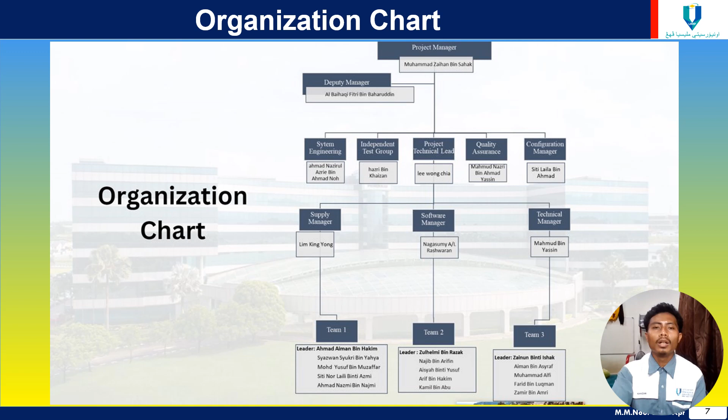Assalamualaikum. My name is Baihaqi Fitri bin Baharuddin, VB21010. For today, I will explain my part, which is methodology in our project.

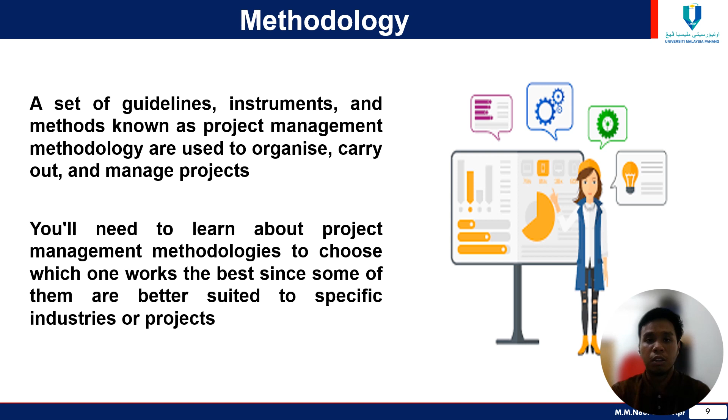The definition of methodology: a set of guidelines, instruments, and methods known as project management methodology are used to organize, carry out, and manage projects. You need to learn about project management methodologies to choose which one works best, since some of them are better suited to specific industries or projects. This means methodology is very important before we do our project or plans.

The first method that we use in our methodology is the Kanban method. Kanban is used to define, oversee, and enhance services that deliver knowledge work, visualize your work, increase productivity, and continuously get better. Kanban is a very popular method that was invented in Japan. So in this method, we use 3 steps.

Which is to do, in progress, and done. In the to-do step, there are techniques to determine what work must be done. In progress, we record work that is being done. And when the step is finalized, we call it the done step. This guarantees the task is done on our schedule.

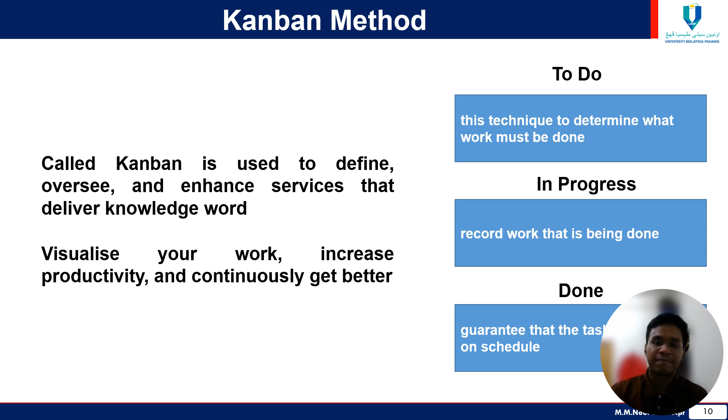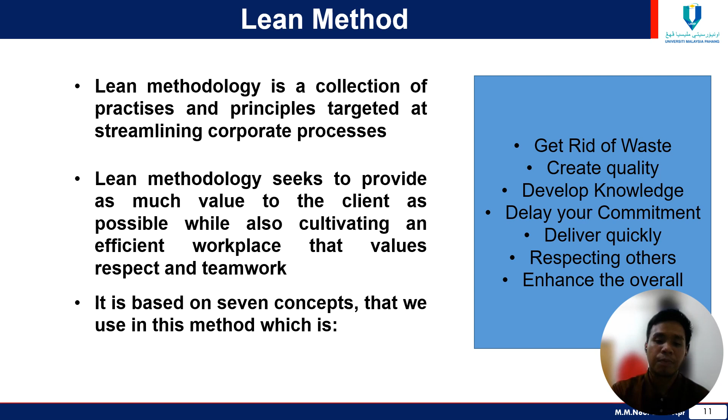The second method we use in our methodology is the Lean method. Lean method is a collection of practices and principles targeted at streamlining corporate processes. Lean methodology seeks to provide as much value to the client as possible while also cultivating an efficient workplace that values respect and teamwork. So why do we use this method? Because there are seven reasons: get rid of waste, create quality, develop knowledge, delay your commitment and deliver quickly, respect others, and enhance the overall. That's why we think the Lean method is one of the important steps we can use for our projects.

The next step that we use is the Six Sigma method. Six Sigma practitioners increase company function and quality control, focusing on managerial strategy that aims to increase performance by getting rid of waste and error while promoting job standardization. Have well-defined data collecting goals such as specifying the data to be collected, the reason for the data collection, the expected insights, guaranteeing measurement accuracy, and implementing standardized data collection methods.

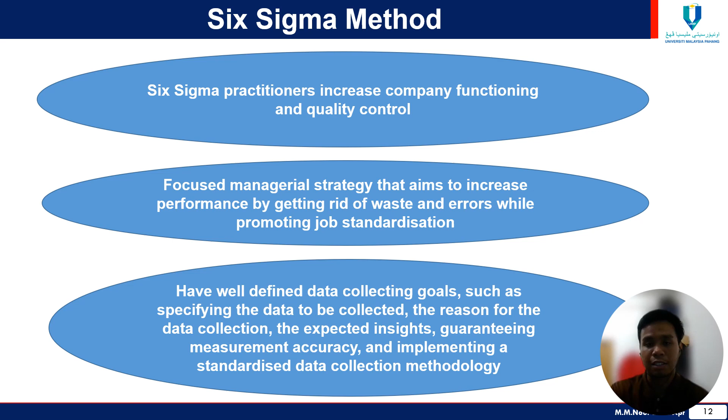So we use a method that is very popular in Six Sigma. I will explain it in the next slides. This is the method that we use in Six Sigma, called DMAIC: D for define, M for measure, A for analyze, I for improve, and C for control. Define is defining the problem, then we measure and quantify the problem, then we analyze how we can solve the problem. If we find a solution, we improve the problem and make a new style, and then we control it so we don't get any more problems.

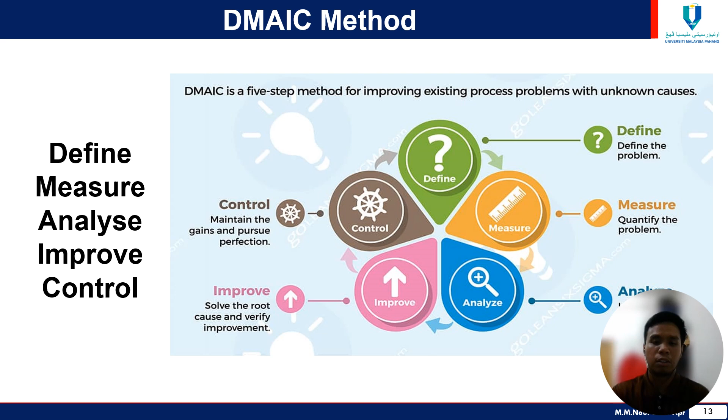The next method that we use is the just-in-time method. Using just-in-time, or JIT inventory system, we can place orders for inventory components directly in line with the production schedule. JIT manufacturing technique reduces inventory costs since we acquire supplies and pieces as needed for production, rather than paying storage fees. In a just-in-time system, you order only what you need, eliminating the risk of stockpiling unusable goods. Just-in-time can minimize waste while maximizing our profit, since every production will clear out the items we have before they become unusable goods and waste our money and time.

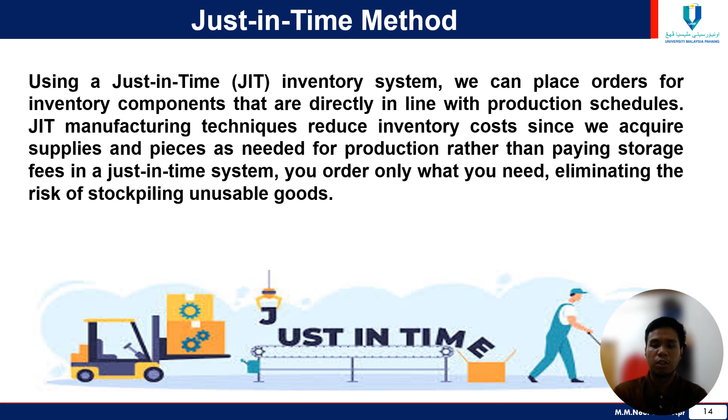Data collection method is one of our methodology that we use in our project. Method of data collecting are approach and procedure used to acquire information for research objectives. Survey, interview, observation, focus group experiment, and secondary data analysis are all typical data collection methods.

Design method: the key to design methodology is finding the best solution for each design situation, whether in industrial design, architecture, or technology. Design methodology also employs basic research methods such as analysis and testing. The evolution of design approach has been strongly linked to precision for a systematic design process.

We use this design method to design our plant in our new manufacturing facility. Design method is very important to emphasize and implement if there's something wrong with our plant designs.

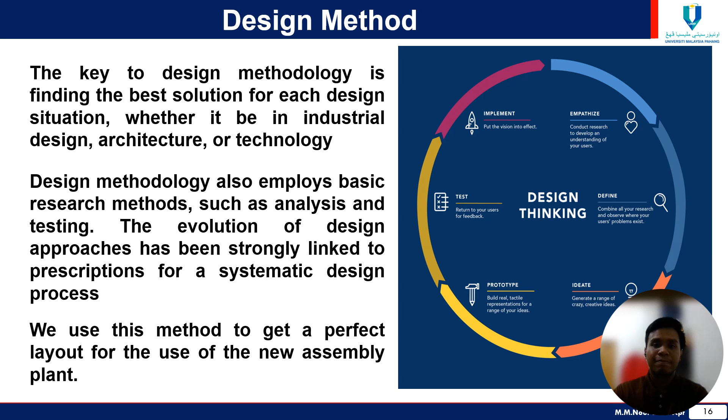So that's all from my part in methodology. Thank you for listening and watching.

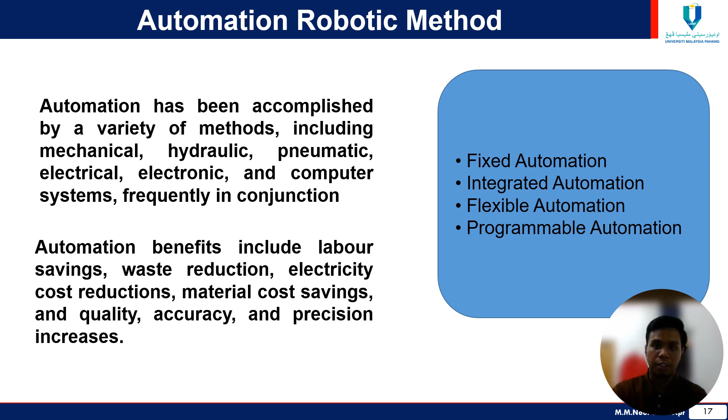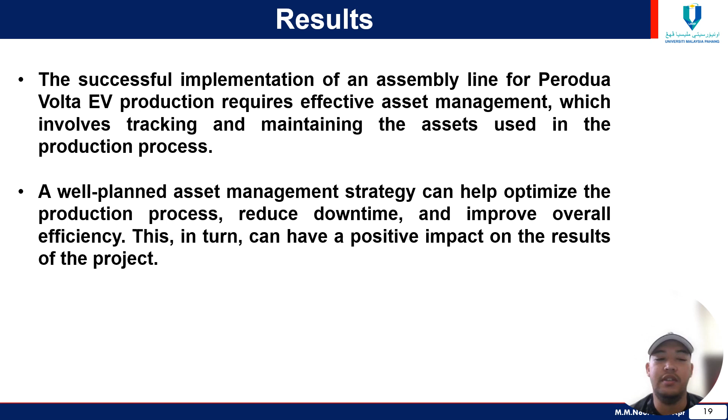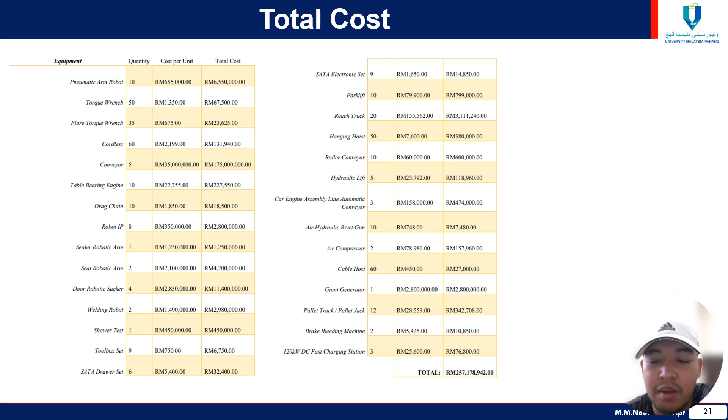Next, Perodua Volta EV assembly line implementation requires significant equipment and personnel investment. The cable host costs RM450 and the conveyor costs RM35 million, totaling over RM257 million for the listed equipment.

However, assembly lines improve production efficiency, quality, and standardization. So these assembly lines will improve production efficiency, quality, and standardization. Robotic arms and conveyors that we bought can boost productivity and reduce errors, and also the shower test that we bought can also boost product quality and customer satisfaction.

An assembly line for Perodua Volta EV production and asset management can increase efficiency, quality, and customer satisfaction, resulting in a high return on investment. I will explain about return on investment later.

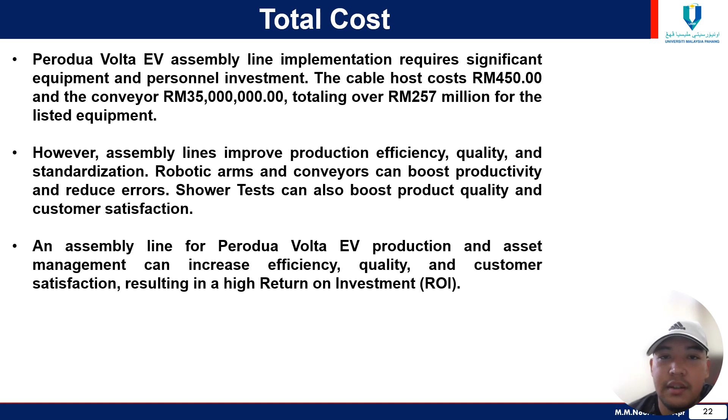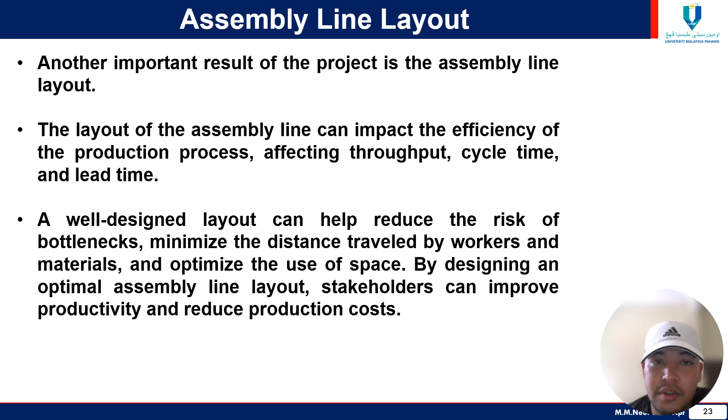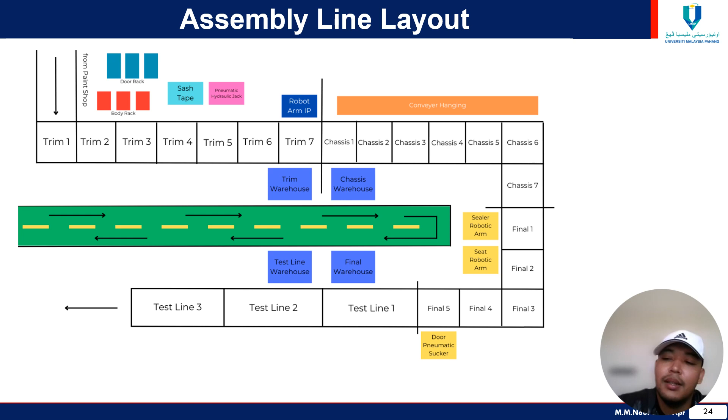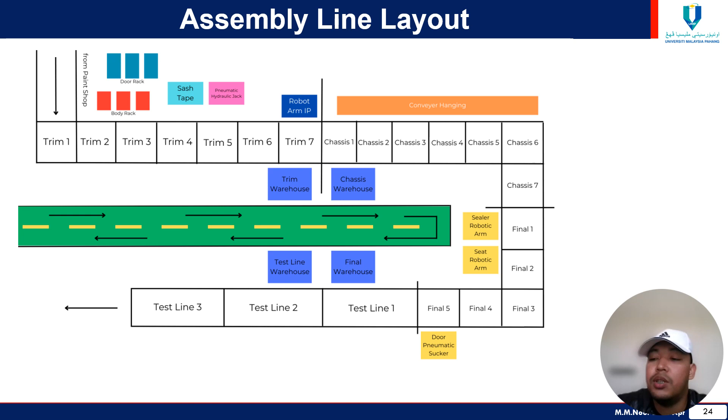Seterusnya test line. Test line yang pertama kita akan lakukan ujian bumping test. Test line kedua kita akan buat ujian alignment dan juga headlamp adjustment, dan test line ketiga kita akan lakukan ujian speed test. Jadi pada setiap bahagian ia mempunyai checkman, iaitu trim checkman, chassis checkman, final checkman dan juga test line checkman.

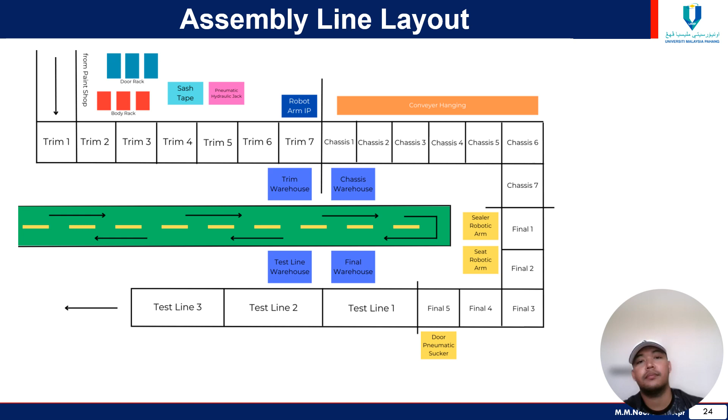Okay, seterusnya, in manufacturing, assembly line layout is crucial to production efficiency and productivity. A well-designed assembly line can improve quality, speed, material handling, and manufacturing costs. It reduces material handling, transportation, and assembly time by reducing workstation distance. This can boost production and reduce assembly bottlenecks.

Dan okay, untuk bahagian ni kita perlu mencipta assembly line yang betul-betul produktif, supaya ianya lancar, dari segi handling, material handling, transportation, dan juga dapat mengurangkan masa assembly dengan mengurangkan workstation distance. Jadi line assembly ni kita cipta tidak terlalu jauh, dan juga tidak terlalu rapat. Okay, ini akan boost production dan juga akan reduce assembly bottlenecks. Bottlenecks ni memang kita nak elakkan.

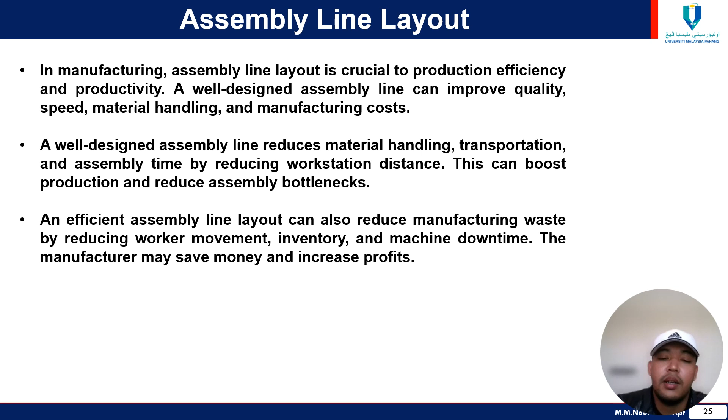Seterusnya, an efficient assembly line layout can also reduce manufacturing waste by reducing worker movement, inventory and machine downtime. The manufacturer may save money and increase profits. Jadi assembly line ni dia akan reduce manufacturing waste by reducing worker movement, dan juga ia akan mengurangkan cost dan juga increase profits.

Okay, next I will explain about return on investment. Finally, the return on investment, ROI, is a crucial result of the project. ROI measures the efficiency of the project by comparing the cost of investment to gain from investment.

Jadi untuk mendapatkan ROI ni kita perlu mengira. Okay, yang pertama sekali cost of investment iaitu aset yang kita beli, equipment yang kita beli, machines dan sebagainya, dan juga kita akan calculate dengan gain from investment. Maknanya ROI ni kita akan dapat tahu sama ada kita untung atau rugi.

In the case of the assembly line and asset management system, the gain from investment is the revenue generated from the production of Perodua Volta EVs. The ROI can help stakeholders determine whether the project is profitable and whether the investment in the assembly line is worthwhile. A positive ROI indicates that the project has been successful and is generating value for the stakeholders.

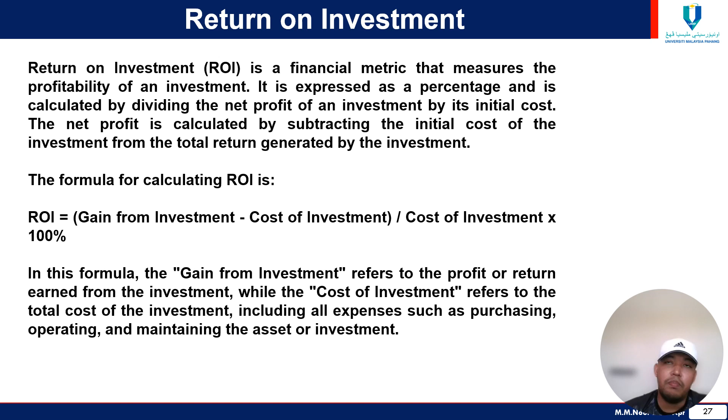Jadi gain from investment ni kita merujuk kepada keuntungan, profit atau return yang kita dapat dari investment, dan juga cost investment macam saya terangkan tadi, ia merujuk kepada total yang kita invest. Contohnya kita purchase asset, machine, equipment, operating, maintenance dan sebagainya.

Next, I will present to you about return on investment calculation of Perodua Volta EV using the formula that I have explained to you earlier. So 1 unit of Perodua Volta EV is equal to 75,000 ringgit. So for the estimated production for 1 day is 15 units. For the first month is 390 units.

For the first 6 months, 2,340 units. For 5 years, 23,400 units.

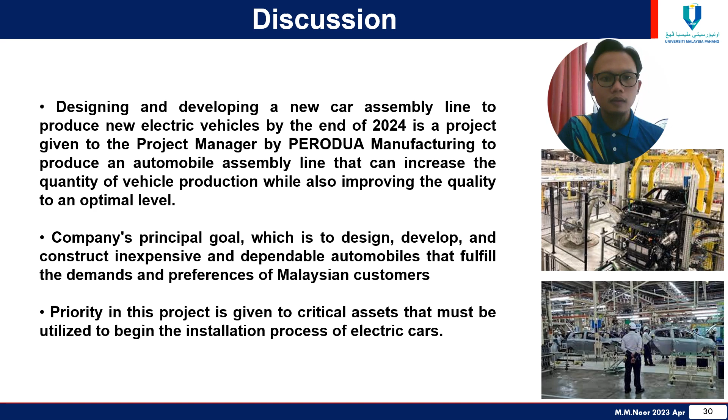Commissioning of the asset must also be acquired from other parties such as DOSH under the Factories and Machinery Act 1967. This is done to ensure the project is completed on time, that no losses are incurred as a result of project delay, that customer expectations are met promptly, and the newest vehicle model is launched instantly. Most importantly, defects in the assembly line are identified, repaired, and improved.

Once the asset is installed, we need to get approval from authorities such as DOSH and others. After getting approval, we are allowed to operate. Otherwise, we have to repair the deficiencies we have created so that the project is completed within the set year.

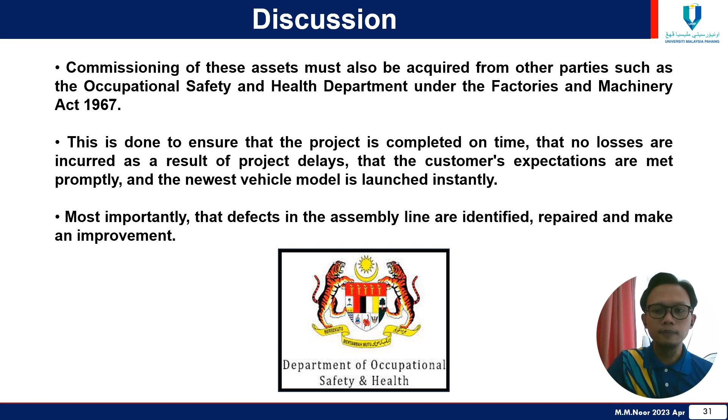Section 4.1: asset to be bought and asset specification. Purchase assets such as robots, conveyors, and equipment that must be present in the vehicle assembly line are underlined. There are various critical aspects to be considered, covering the kind of vehicle to be produced, the size and scale of the assembly facility, the estimated output, and the company budget.

There will be certain alterations and extra equipment to optimize the job and launch the assembly line flow. Conveyor systems, battery charging machines, arm robots, and other equipment used to assemble different vehicle components are examples of assembly line equipment.

Why do we say there are various critical aspects to consider? This is because we need to buy robots and other sophisticated equipment so that there are no interruptions during the vehicle assembly process.

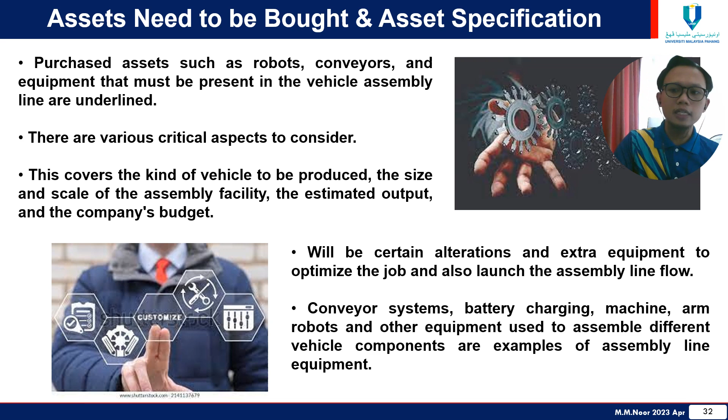Material handling equipment such as forklifts, reach trucks, cranes, pallet hydraulic jacks, and other gear used to transport throughout the assembly facility is critical. This maintenance and repair equipment is particularly important for repairing automobiles that have flaws and must be corrected so that product quality is not compromised.

In addition, material handling equipment such as forklifts and so on is also given importance, because it is important for smooth operation in production. We also list important equipment to carry out important work such as repairing cars or doing maintenance. Even though it's expensive, quality should be our priority.

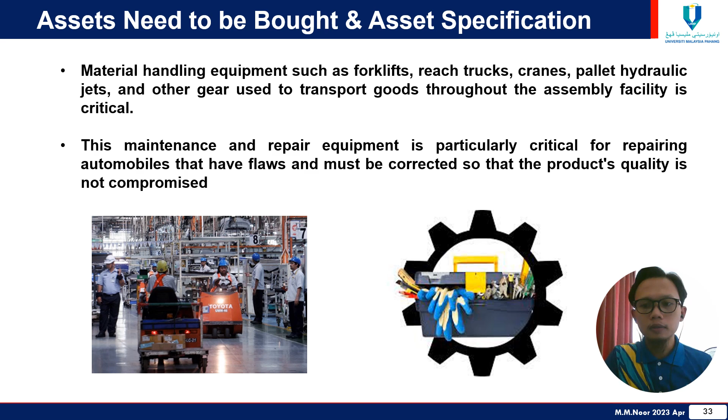So total cost. The whole cost of planning and creating a new production line for a new electric car is quite expensive. Total cost is critical in many aspects of project management, including not just project but also many other aspects of management. This is due to the fact that it enables stakeholders to plan spending rate, prevent loss from occurring, and get insight into project success by comparing overall project expense to budget and timetables.

The total cost spent by Perodua Manufacturing to create a new assembly line for the production of electric vehicles. It costs a lot of money, but in order to respond to the government's call for green energy, this is the best step.

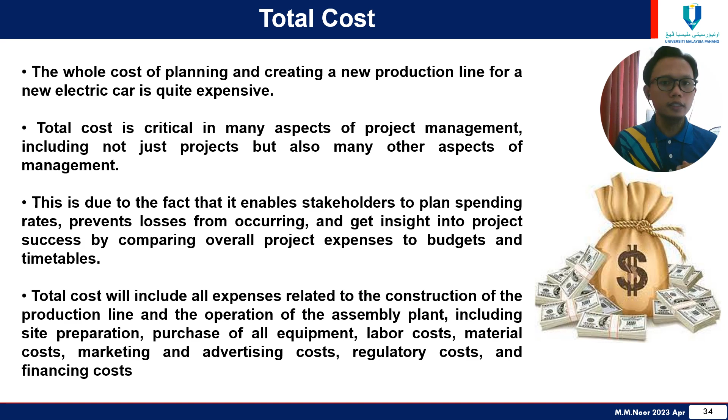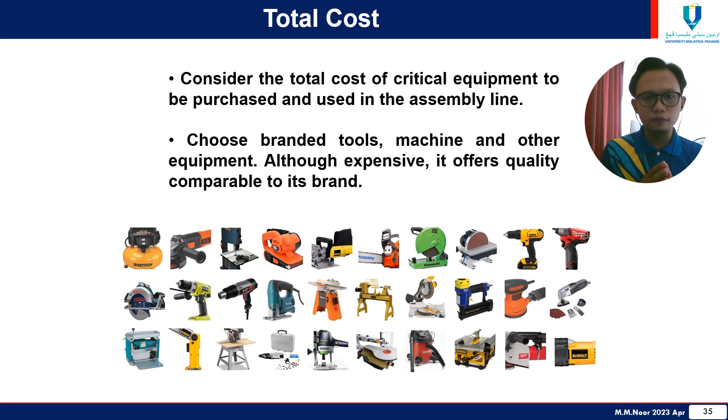So 4.3, this is a new assembly layout. This new vehicle manufacturing line idea needs extensive investigation. Several factors we consider, including the location of the site, suitable machine robots, equipment for assembly, as well as the estimated vehicle production on the production line within a day, plus more.

All study has been conducted by closely watching prior automotive manufacturing lines that create vehicles such as the Perodua Ativa, Myvi, Aruz, and Axia. One car assembly line has been separated into 3 divisions or departments that have various work procedures but yet fall under the same scope of work, which is the assembling of vehicle components. Trim, chassis, and final are the 3 departments in the assembly line.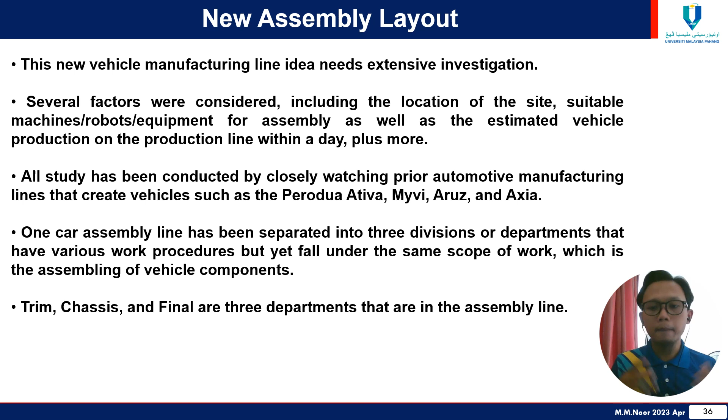The following is the new assembly layout for the electric vehicle assembly line. There are several departments in this production, including trim, chassis, and final. These three are the assembly departments, while the test line department is the department under quality control.

The work process in the trim department of a Perodua assembly line factory typically involves the following steps, such as vehicle arrival, interior component installation, electrical system integration, and many more.

While other work processes in the chassis department, examples are frame preparation, suspension and steering, brake system installation, drivetrain assembly, exhaust system installation, and many more.

And lastly is the final installation process in the final department. The work process in the final department of a Perodua assembly line factory, also known as the final assembly department or the finishing department, typically involves the following steps, such as electrical system verification, fluid check, wheel alignment, testing and quality control, final inspection, and the last is documentation and verification.

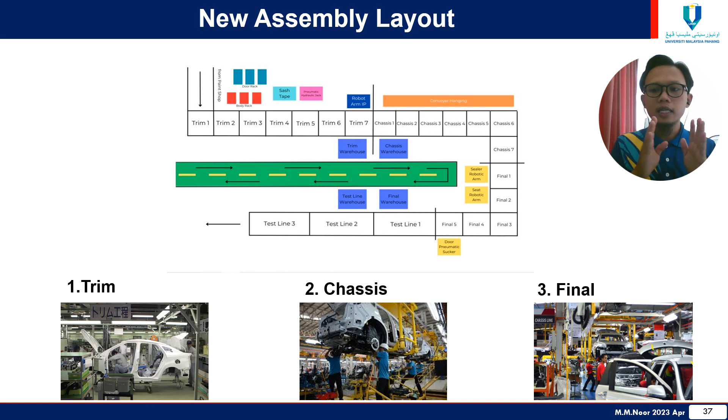4.4 Return on Investment. Return on investment, or ROI, is a method utilized while executing a new assembly line project for a new electric vehicle manufactured by Perodua Manufacturing. It gives a quick and easy way to assess an investment's profitability and financial success.

ROI simply needs basic financial information, which is why it is considered that the cost is easy to calculate, use, and comprehend. ROI may assist in analyzing the company's success by tracking investment ROI from time to time according to the firm's investment. Decision makers can review investment performance and make modifications if a project to be carried out can provide the company significant profit.

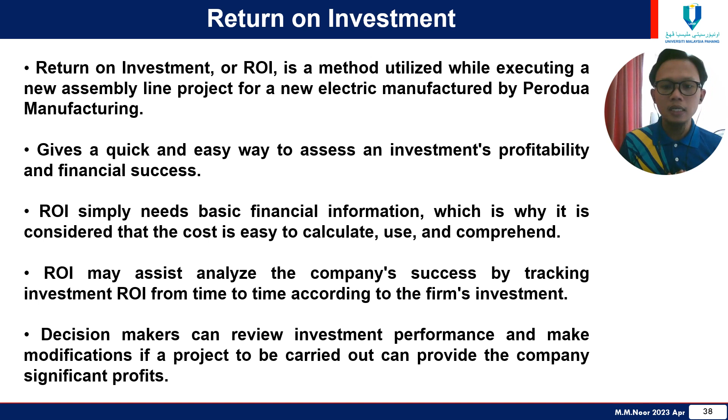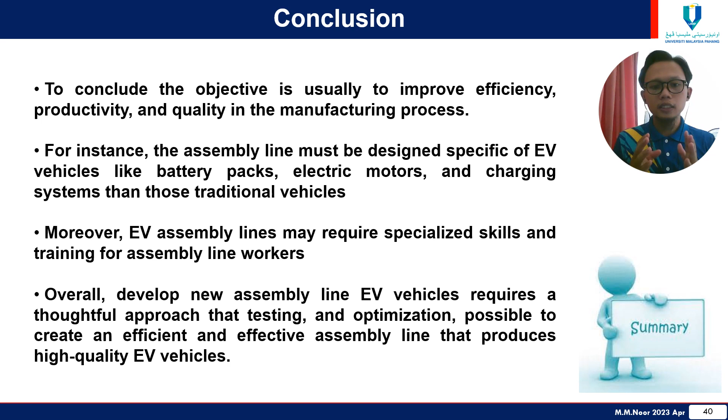So lastly is the conclusion. To conclude, the objective is usually to improve efficiency, productivity, and quality in the manufacturing process. For instance, the assembly line must be designed specific to EV vehicle components like battery packs, electric motor, and charging system, unlike those of traditional vehicles. Moreover, the EV assembly line may require specialized skill and training for assembly line workers. Overall, developing a new EV assembly line requires a thorough approach of testing and optimization to create an efficient and effective assembly line that produces high quality EVs.